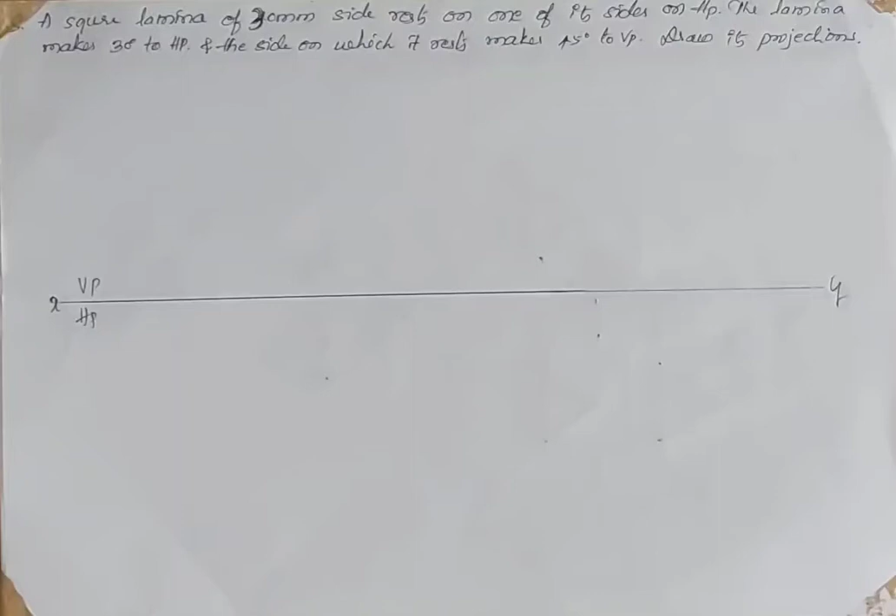A square lamina of 30 mm side resting on one of its sides on HP. Resting on one of its sides on HP is important. This is on HP on one of its sides or edges, meaning this side edge should come, and then which makes 30 degrees to HP.

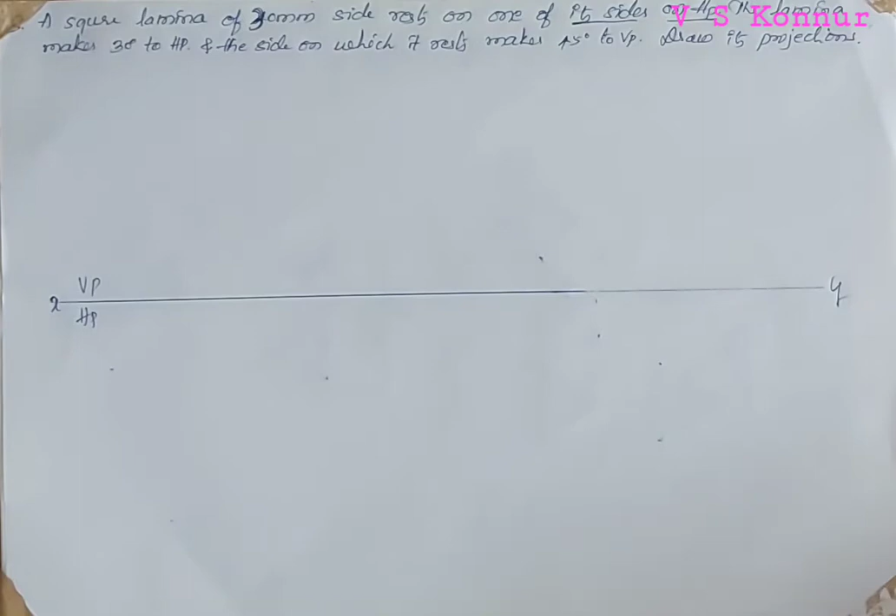The lamina makes 30 degrees with the horizontal plane. The lamina makes 30 degrees with HP, and the side on which it rests makes 45 degrees to VP, is the problem. Now we'll construct a square lamina resting on the horizontal plane.

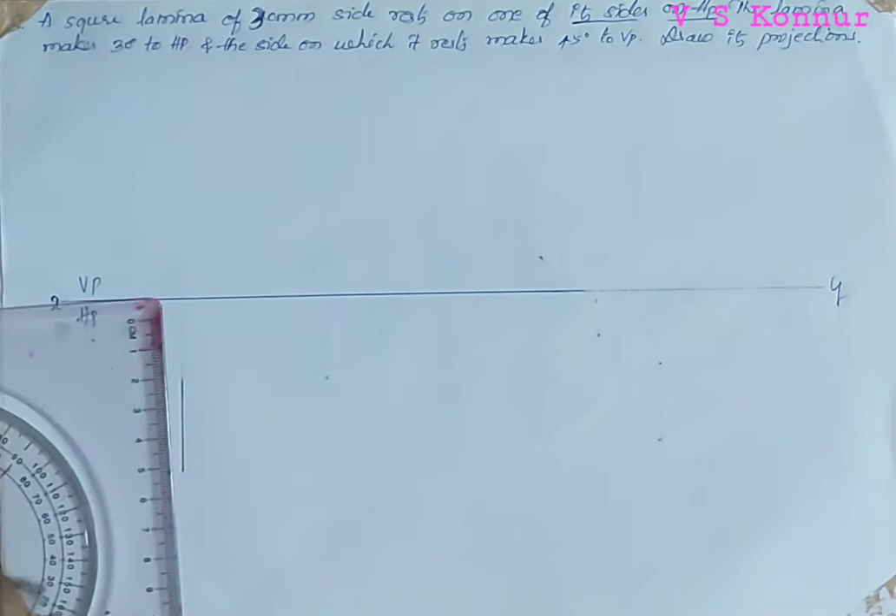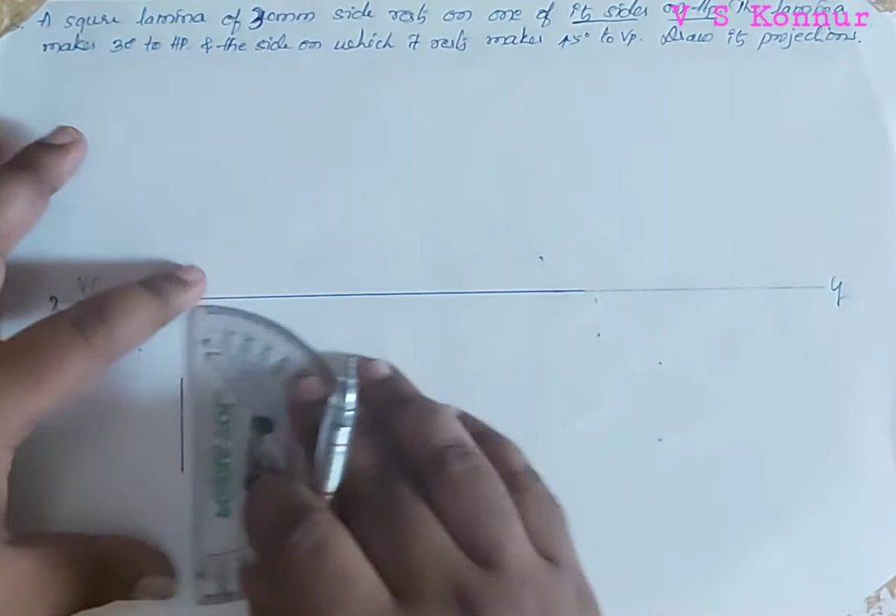So we'll draw. It is having 30 mm side, so we'll take 30 millimeter side. So 30 millimeter side I have taken, and then from this point you should take, from the end of 30 mm you should take 90 degrees, and then from this point you should take 90 degrees to construct resting on HP.

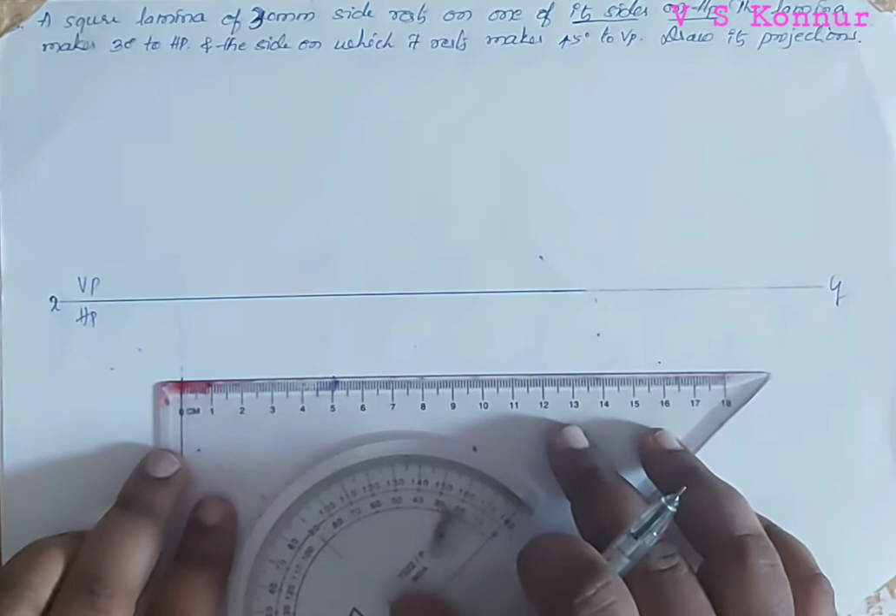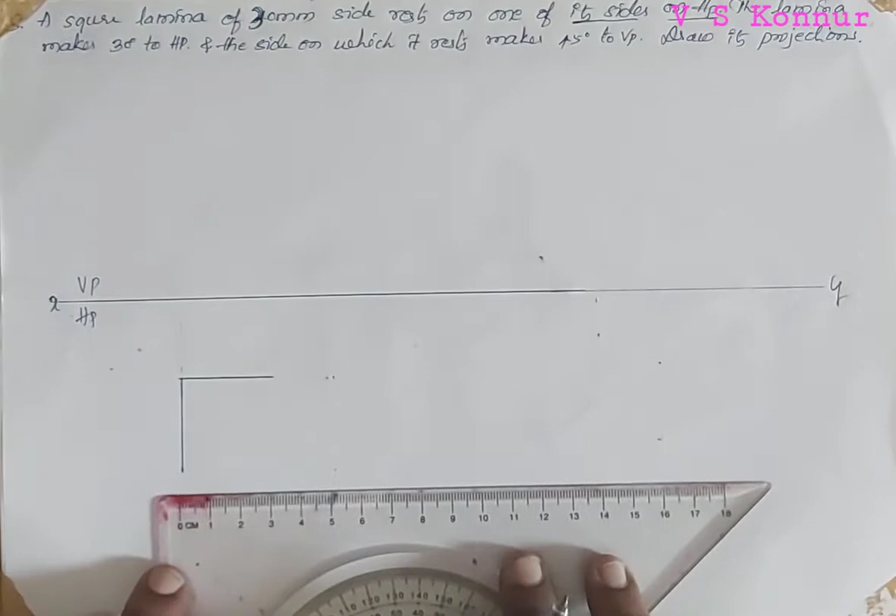On either side you should take 90 degrees, and then join with the help of only 30 millimeters. So this you have taken 90 degrees, so we will take 30 mm square, and then this is the 90 degree point. For that only take 90 degrees, only take 30 mm because the square is having 30 millimeter side, or you can draw the line and you can cut. So this is how you have to construct

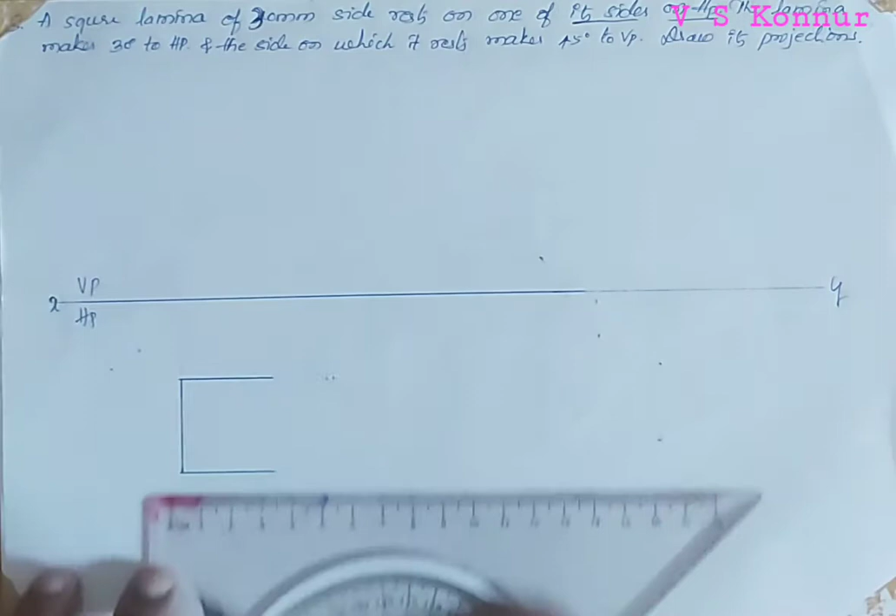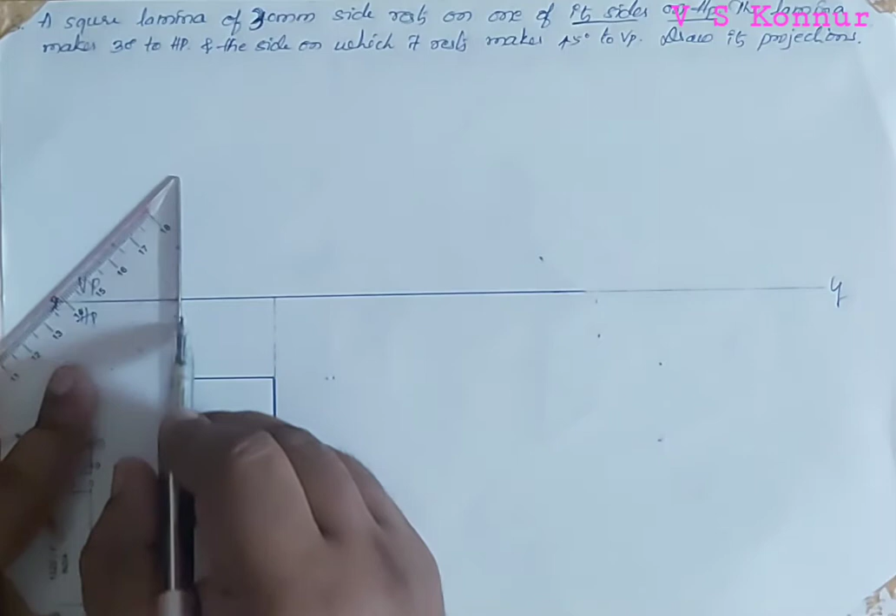a square lamina of 30 mm side resting on one of its sides. And I have drawn the projectors. These are the projectors, and it is having 30 mm side, 30 mm side which is resting on one of its sides.

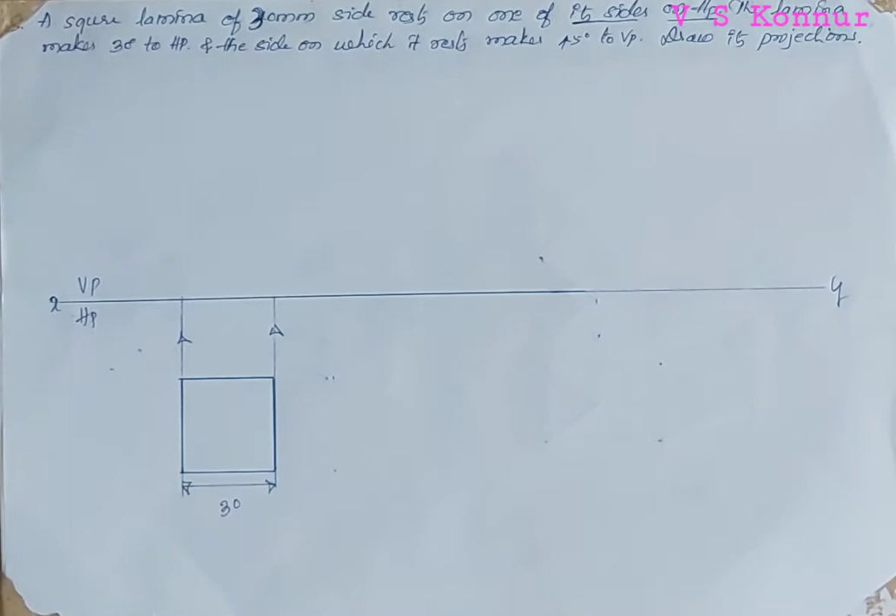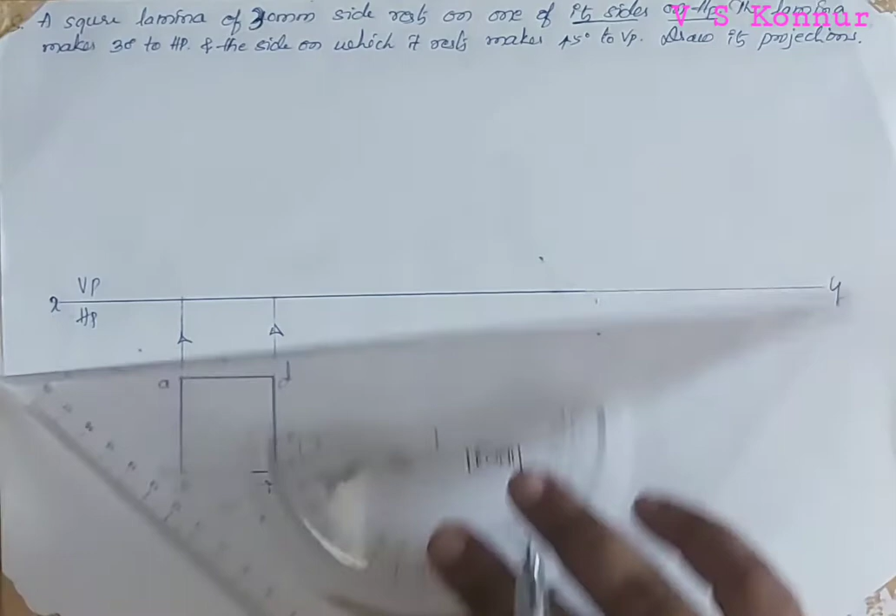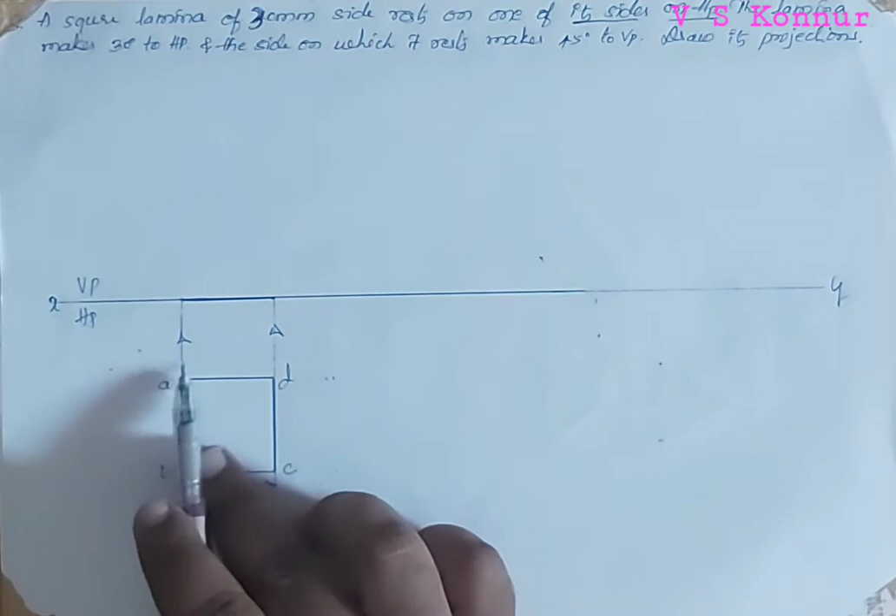A square lamina 30 mm side resting on one of its sides on HP. This is the first position. Then A, B, C, D. Then you should draw a lamina with a dark line by intersecting the projectors on XY line. So where these projectors intersect on XY line, that is called the lamina.

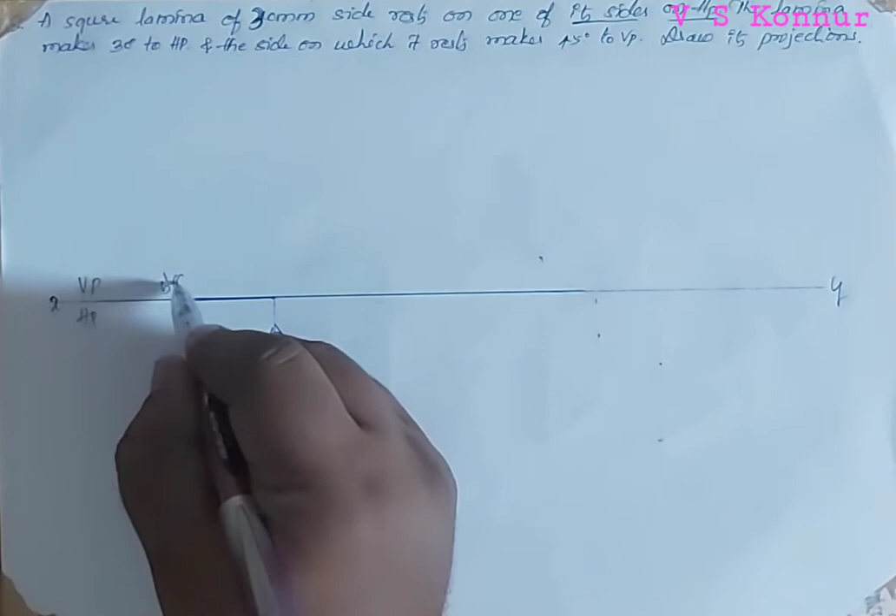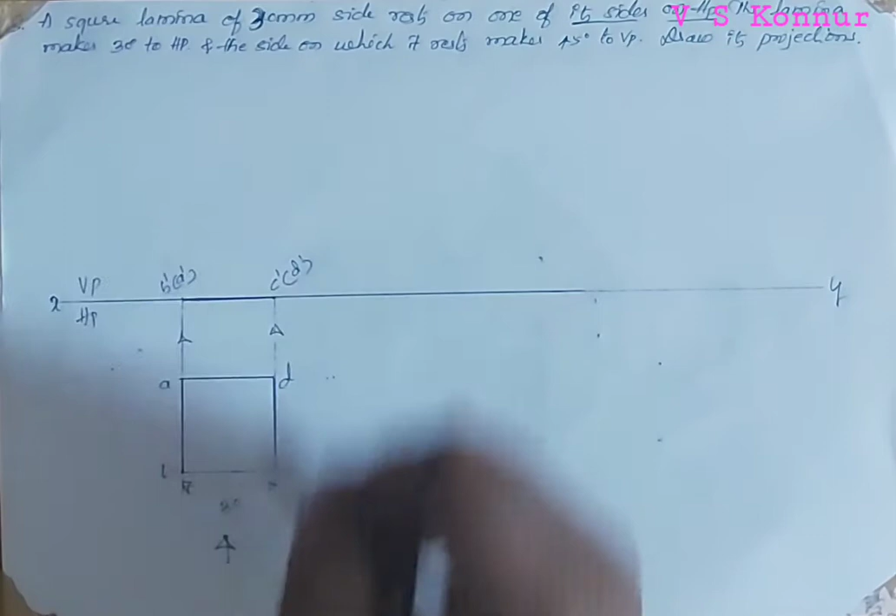So when you are viewing from this side, B is visible, it is outside of the bracket. A is not visible, inside the bracket. Dashed are always above XY line. Now C is visible, D is not visible, inside the bracket. So front view is always indicated with dash. So this is the first position.

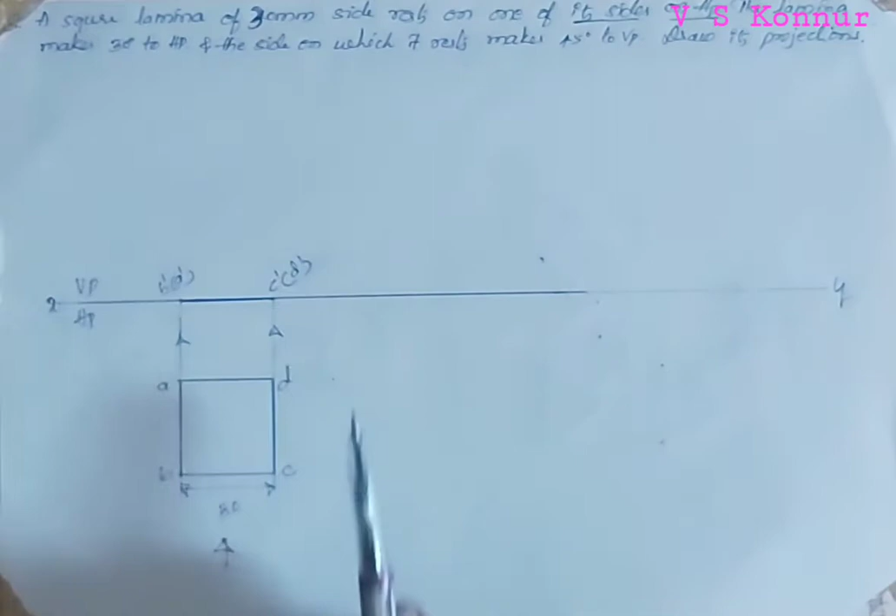Now second position, it is resting on HP. Because of that, HP angle you have to consider at the beginning. Now it is 30 degrees with HP. It is inclined 30 degrees with HP, and it should be drawn in VP. When it is resting on HP, you should select the HP angle first, and that should be drawn in VP or above XY line.

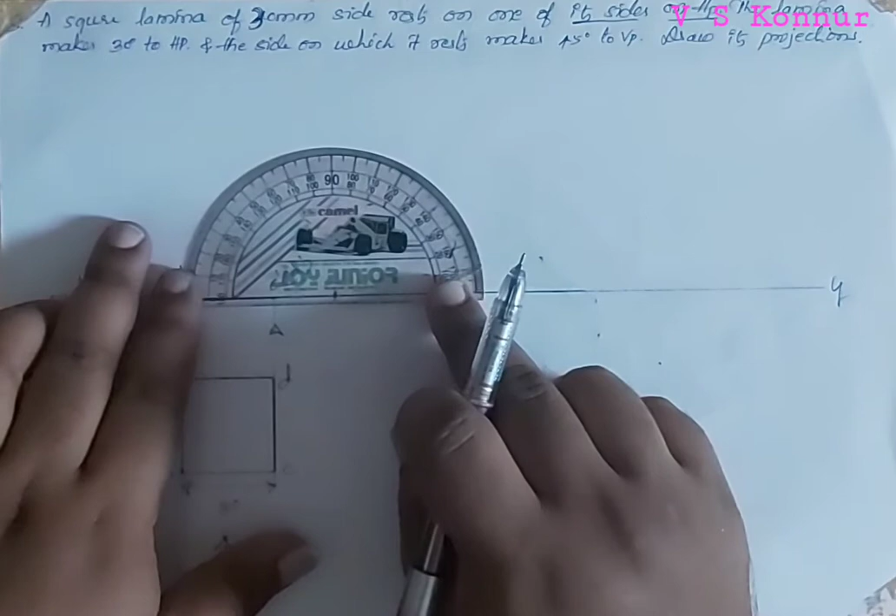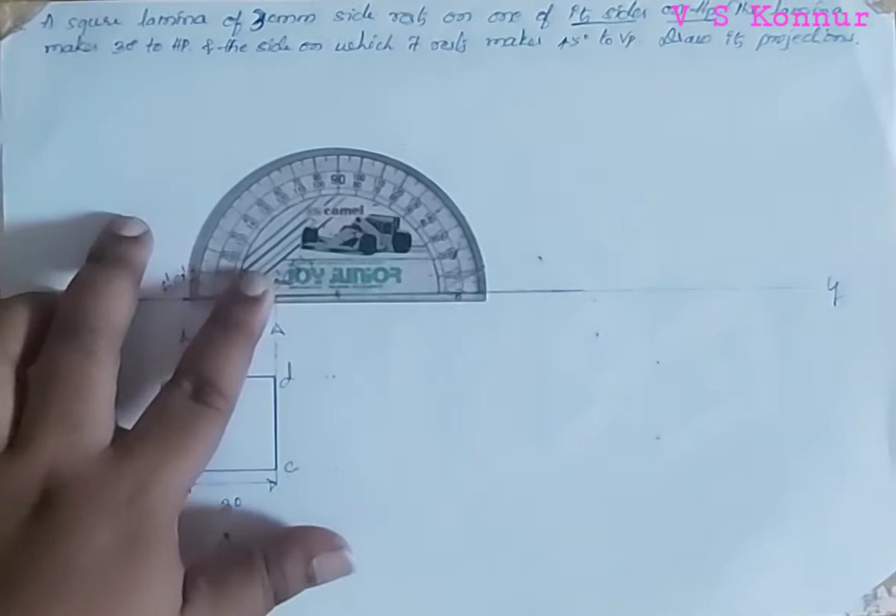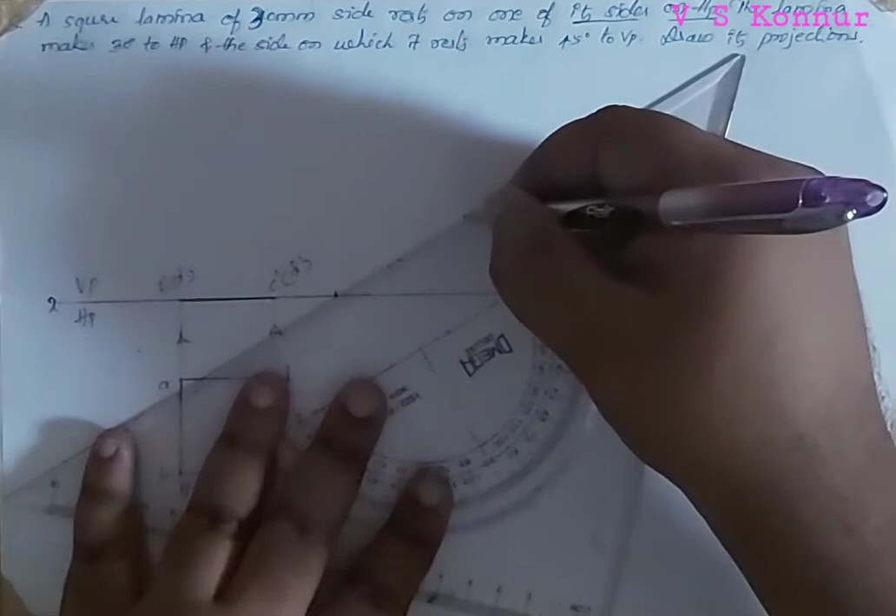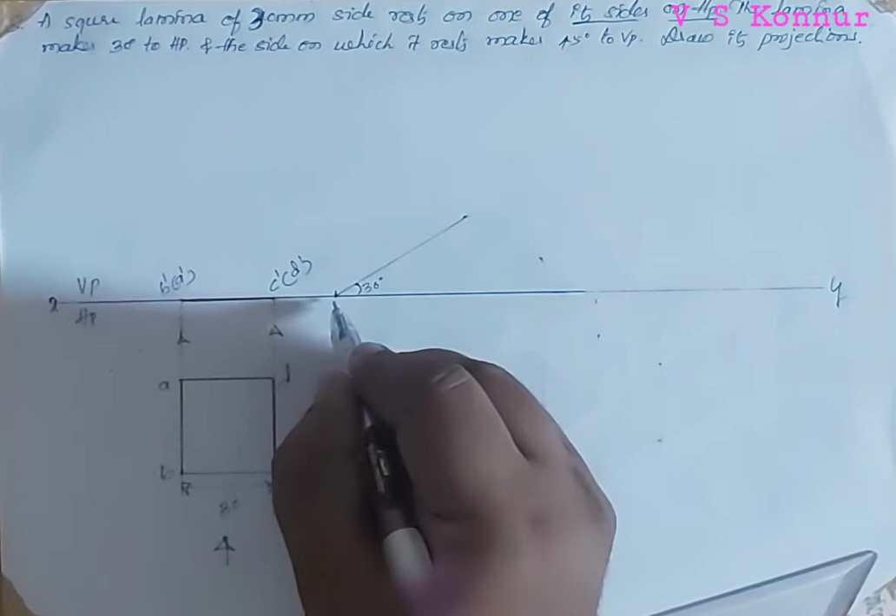From this point I will take 30 degrees. So from this point I will take 30 degrees. So I marked a 30 degree point there, and then we'll join these two points with thin lines. With thin line you have to draw the 30 degree line, and this point is nothing but B dash A dash.

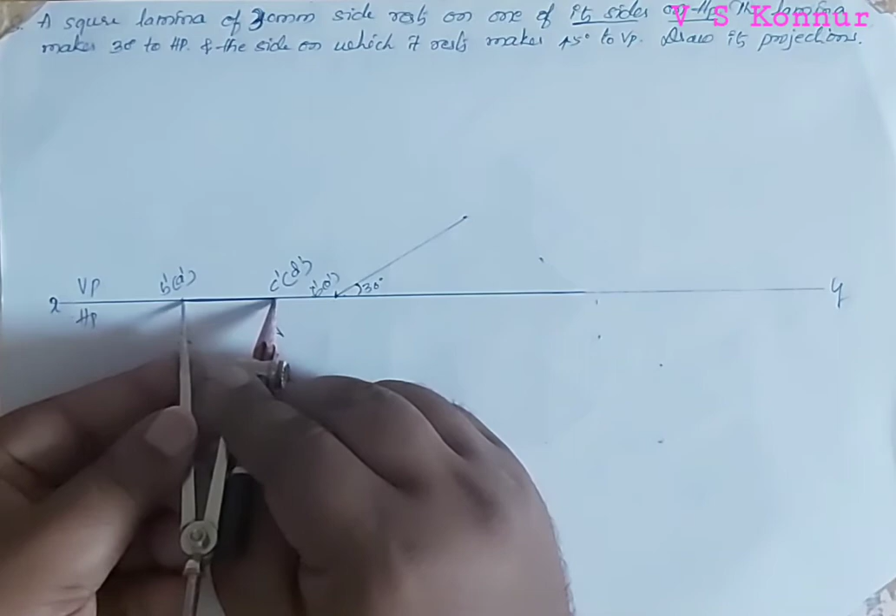Whatever the point I have marked here on the 30 degree line, that first point is called B dash A dash point, and then you should take the distance from B dash A dash to C dash D dash. So this distance you have to take, B dash A dash to C dash D dash. Then keep at B dash A dash point where you have drawn the 30 degree line, and cut that 30-degree line by B dash C dash distance.

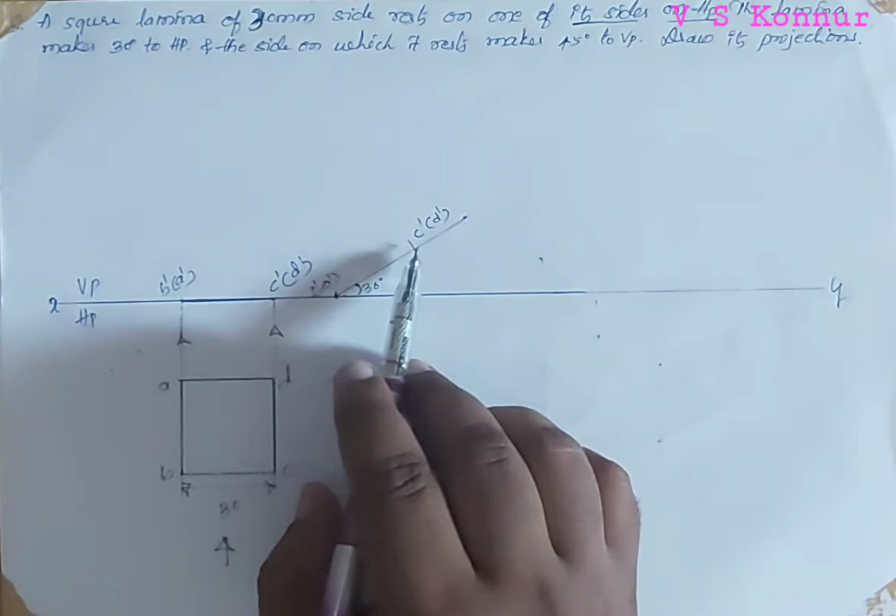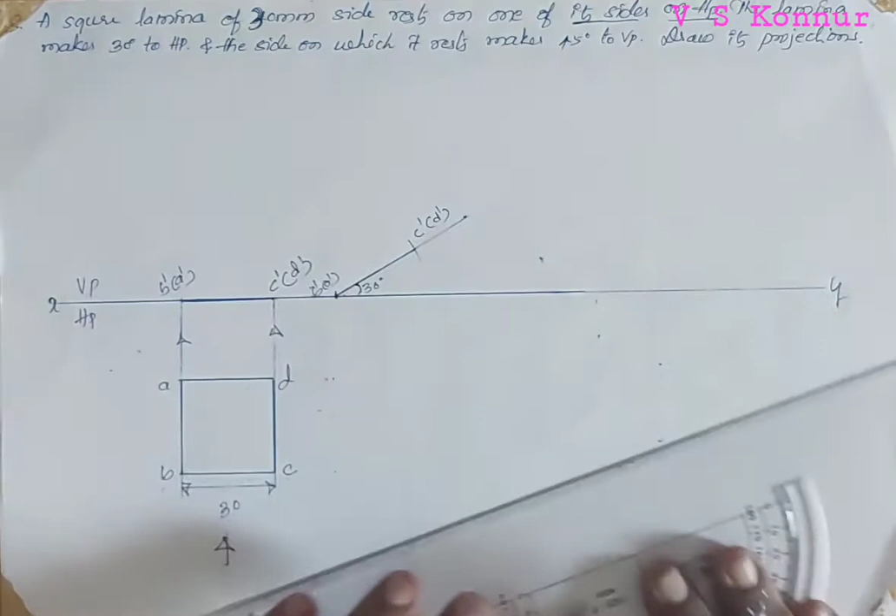Now we got here C dash D dash. The B dash A dash to C dash D dash distance we have taken from this lamina, and by keeping at B dash A dash point, cut this distance C dash D dash on the 30-degree line. Now make that point dark. Only this lamina you have to make dark. That is the construction line, the 30-degree line, it should not be dark.

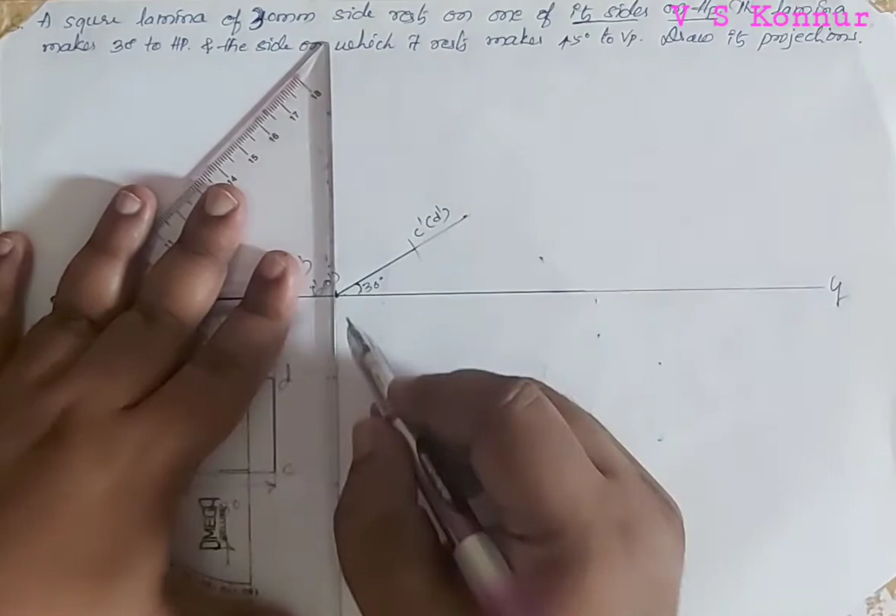And then draw the projectors, taking into consideration these projectors should be, so I'm just taking the parallel lines. So draw the projectors from both the points. With thin line you have to draw.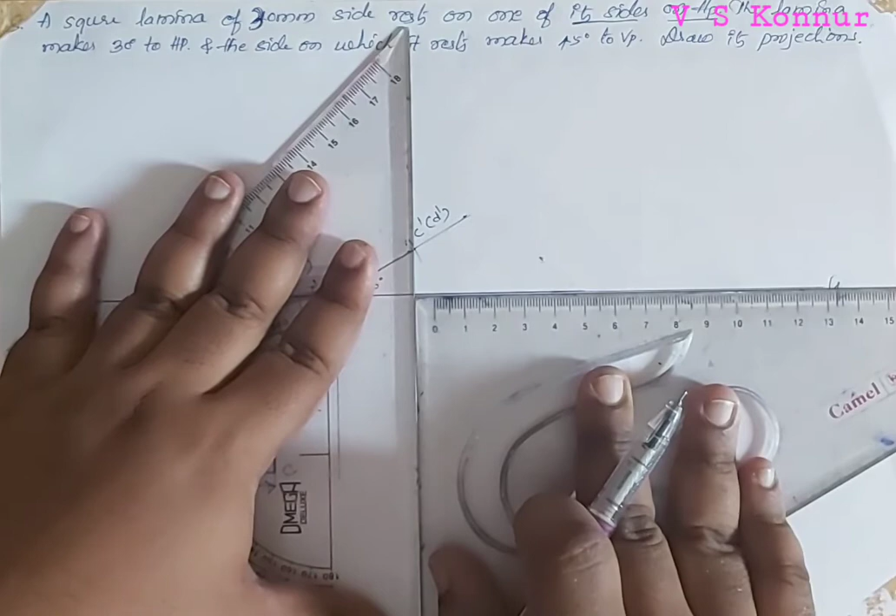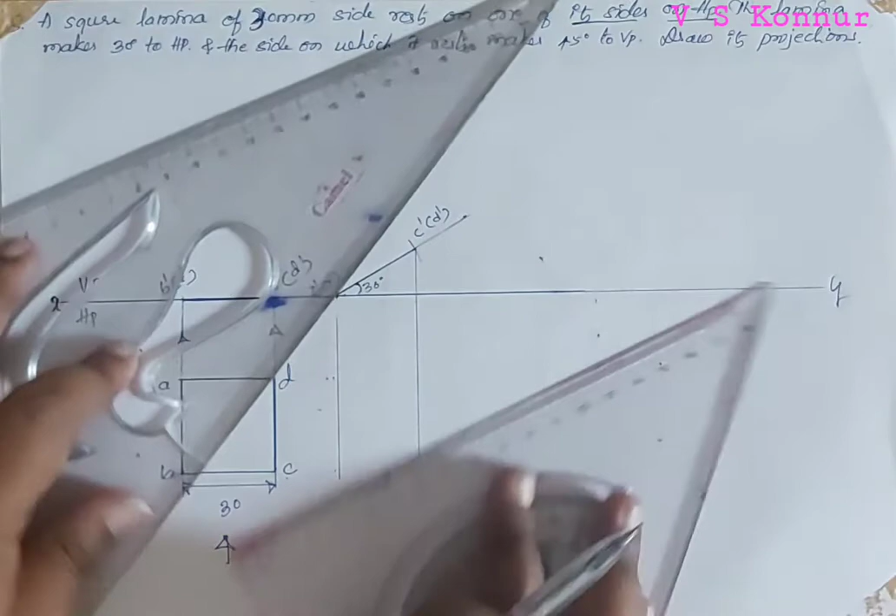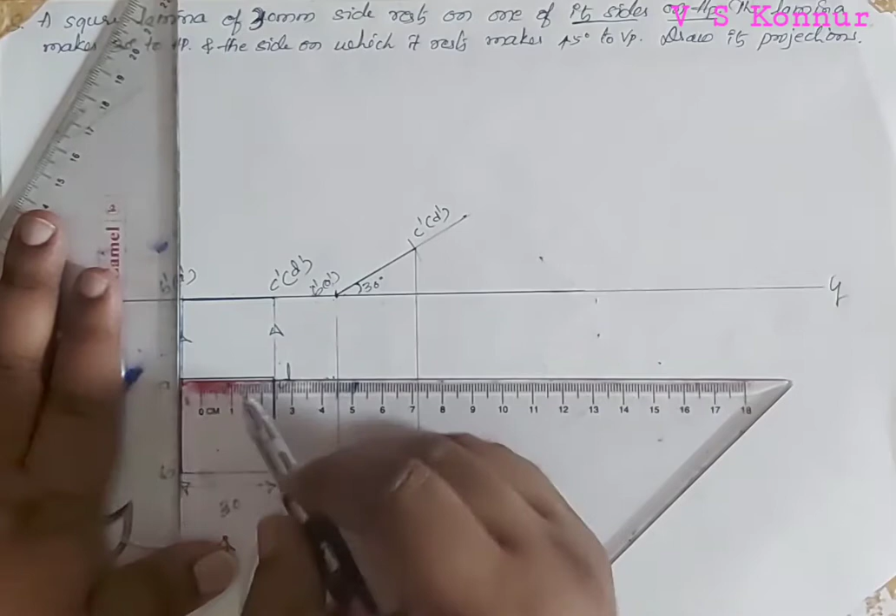And then draw the projector. Parallel to this you have to draw the projector. Or you can take this as reference and draw the projector lines. And we got all the projector lines. So just give the arrow mark for that, how these lines have been drawn.

So A is here, both are intersecting. This is A point. D is here, so this point is called as D. Both are intersecting at this point. B will come from top, so both are intersecting here. So A, B, C, D. Now make only that part dark, A, B, C, D.

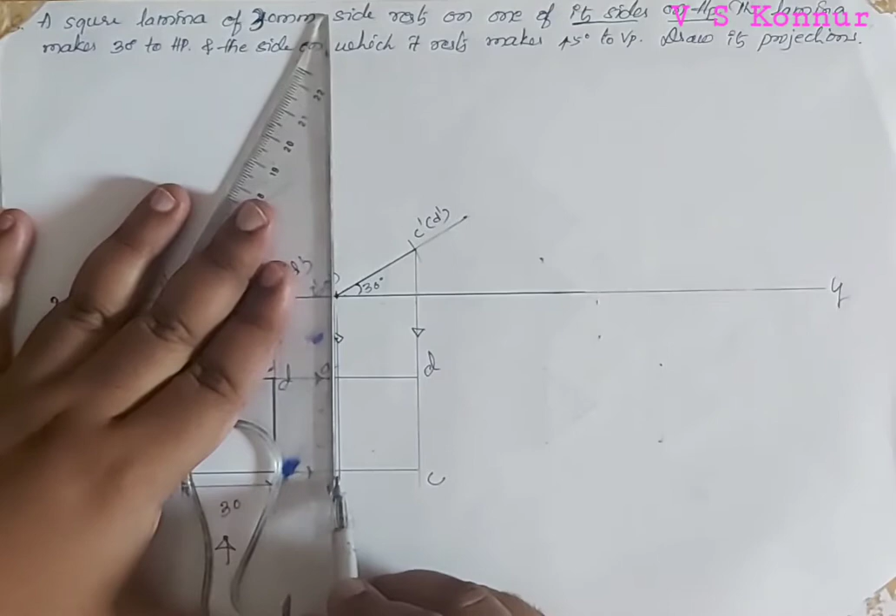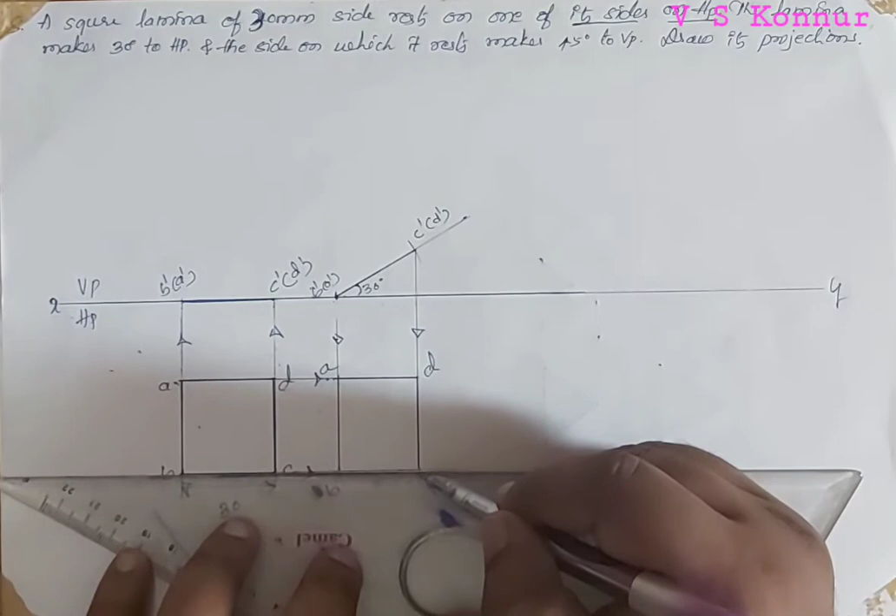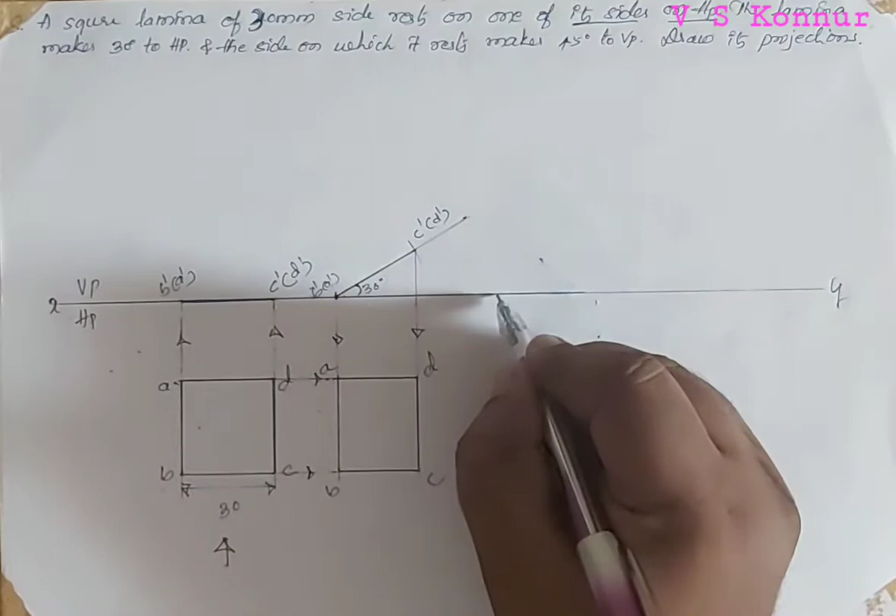Now, next question: 30 degree to HP is over. The side on which it rests is this. This side makes 45 degree with VP. So 45 degree line will be drawn here. From that point we'll draw the 45 degree line.

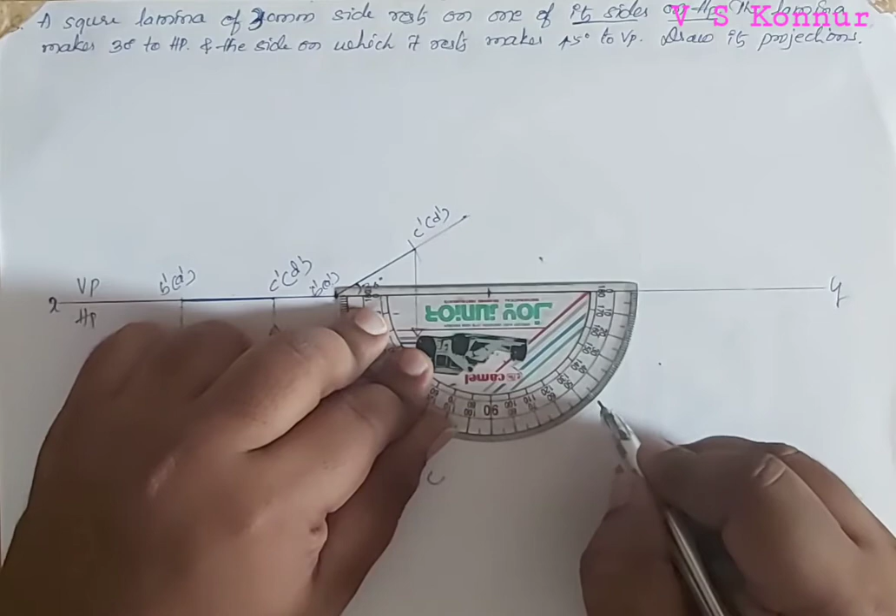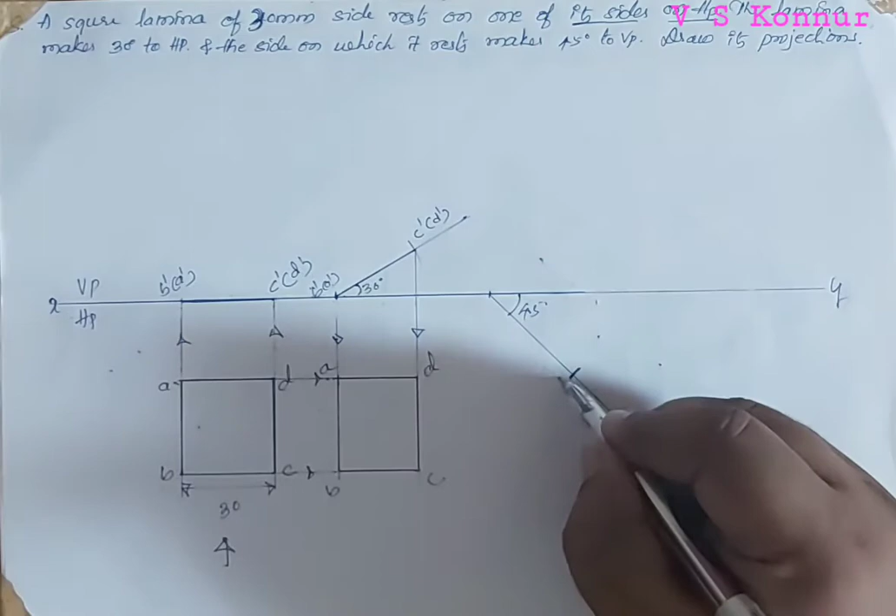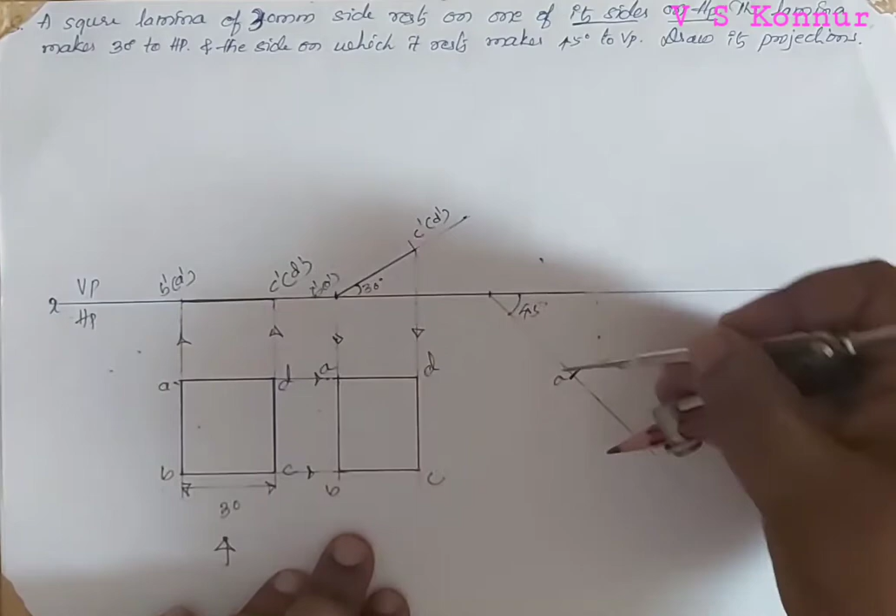Now join these 2 points with thin lines. Thin line. Now we'll mark A point. This is the 45 degree line I have drawn. I have marked the A point and I will take the distance AB, that is 30 millimeter. Keeping at A point we will draw an arc on the 45 degree line and we will get B point.

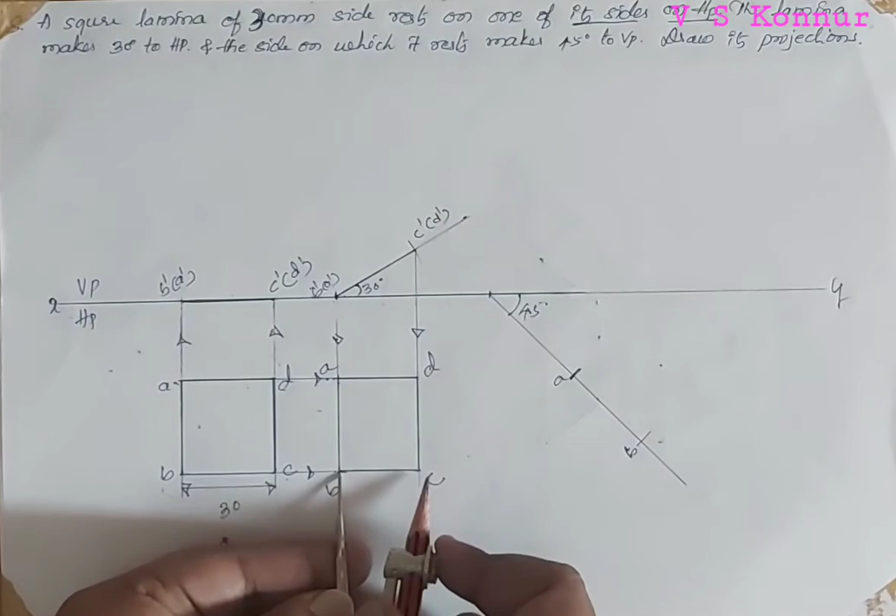From both the points you should take the distances by taking 90 degree or with the help of divider. Now we will take this BC distance or AD distance, both are same. So AB, BC or AD you can take, both should be same. So I will draw arc on either side. We will draw arc here.

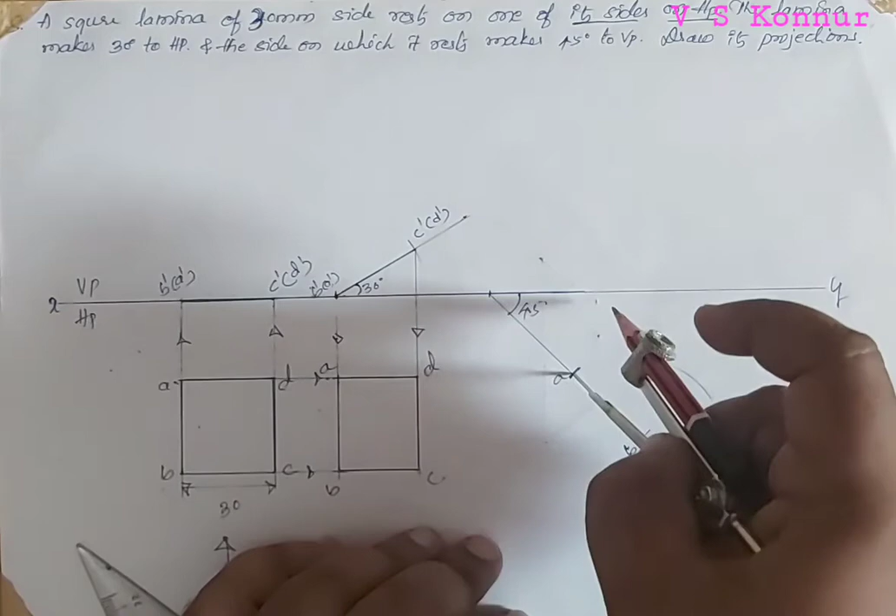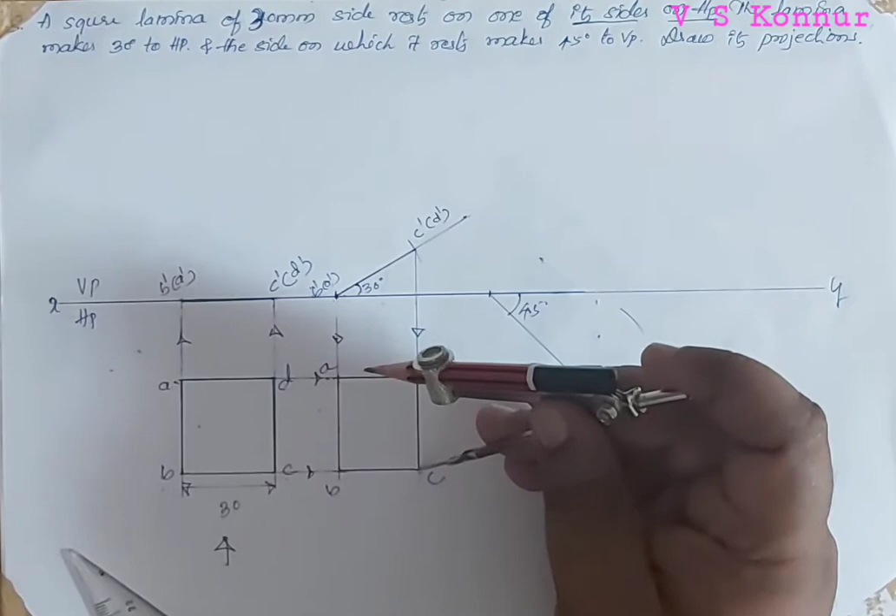Now after drawing the arc, you can take 90 degree from this point, or one more, I will explain here, the opposite corners. B to D is the opposite corner and C to A is the opposite corner. So both should have same distances. So by keeping at B point, cut that arc, and by keeping at A point, cut this arc.

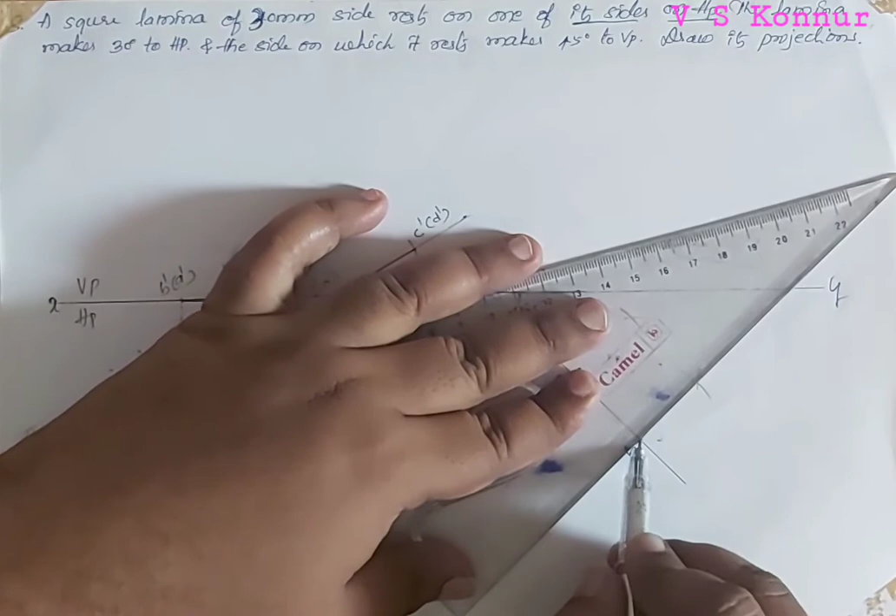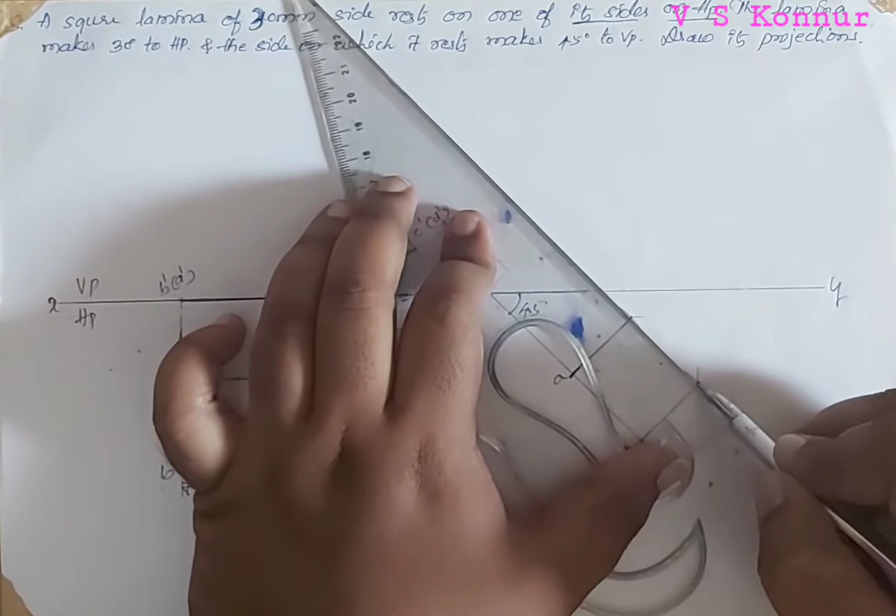So you will get 2 points. So just join by using scale. On either side you have to join. Then join these 2 points. And make this AB also dark. Now the same has been transferred here by using divider. There is no protractor. By using divider we have constructed ABCD at 45 degree line.

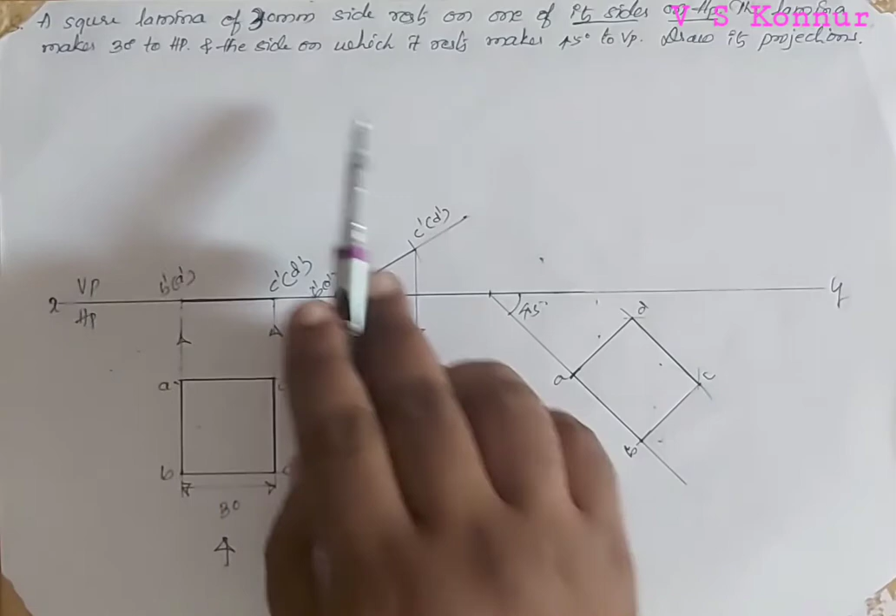Now we got ABCD here because the resting edge is inclined. Very important, the side on which it rests makes 45 degree with VP.

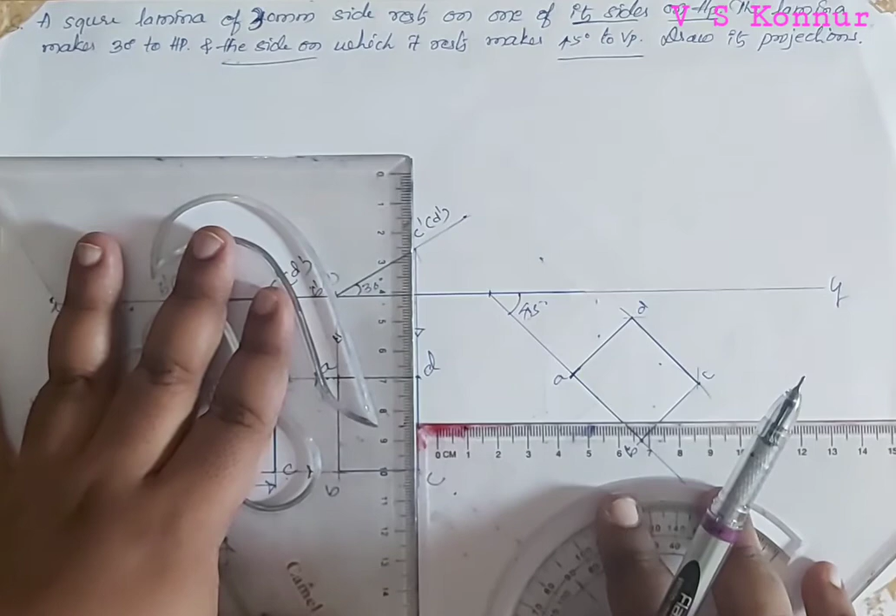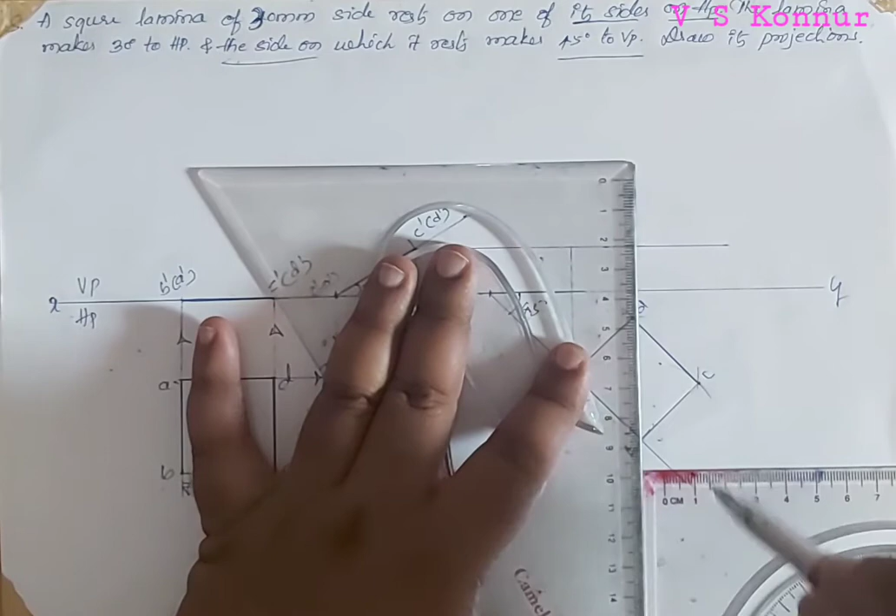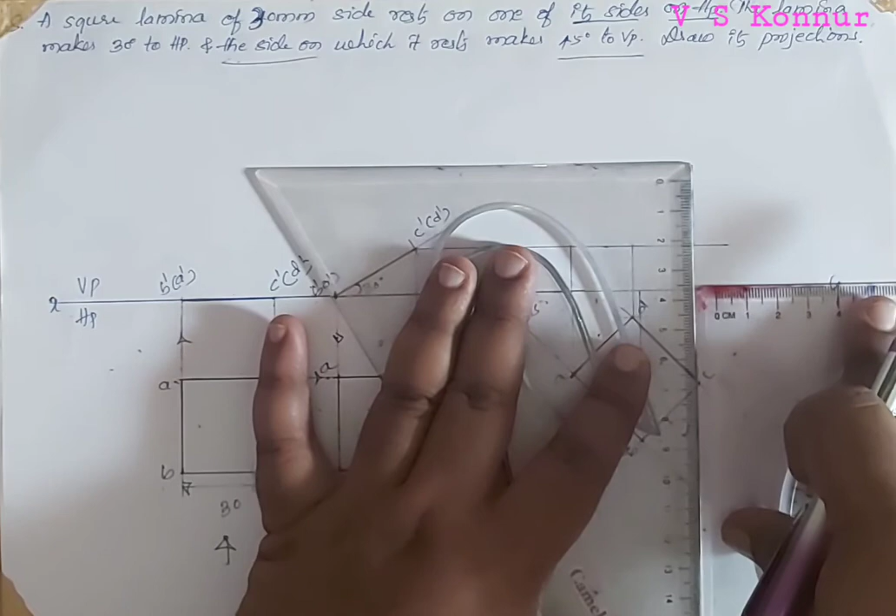Now from A point I'll draw the projector, and then from D point, then from B point, then from C point. I got all the points.

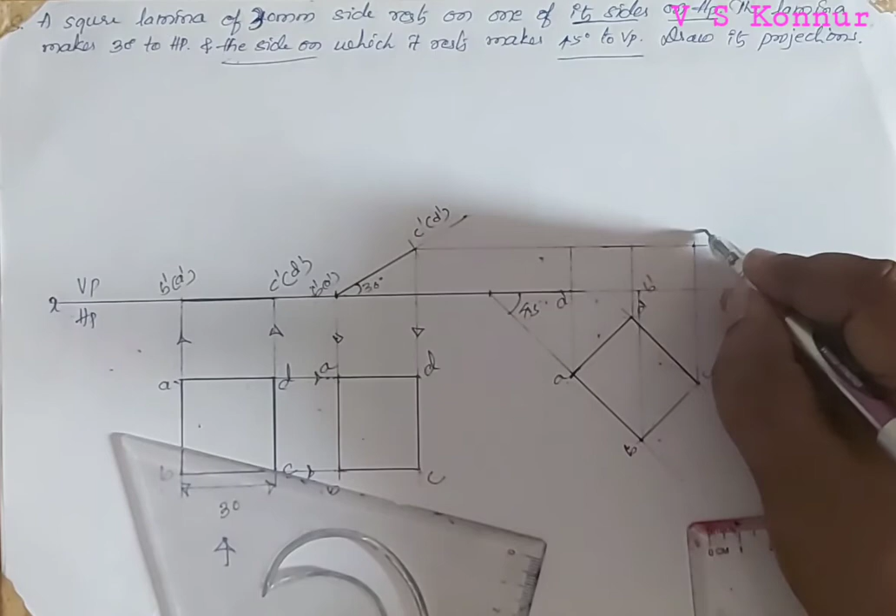Just mark here this A point and A point from here. It will be intersecting here. That is A dash. B dash point is here. Then we'll get C dash. Here we'll get D dash point. So we'll give the arrow marks for all those projectors.

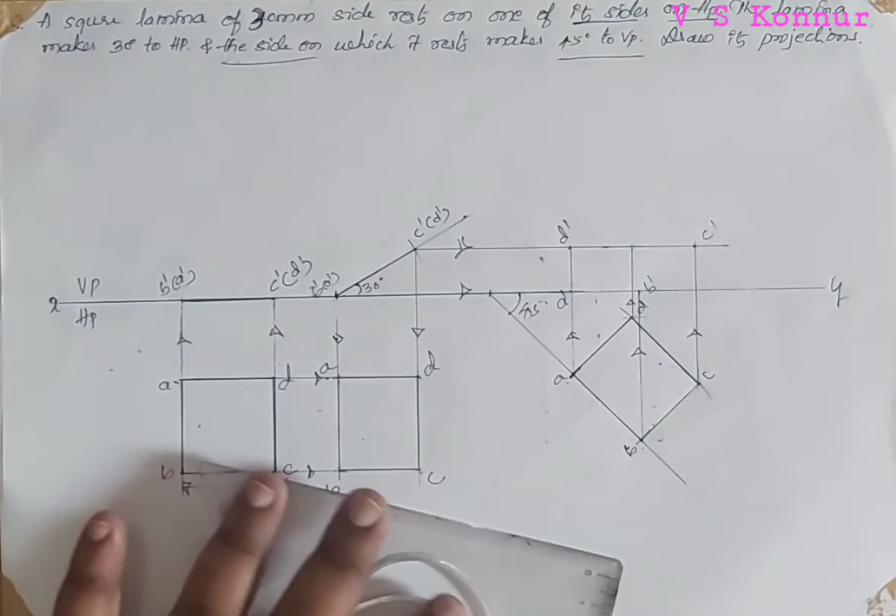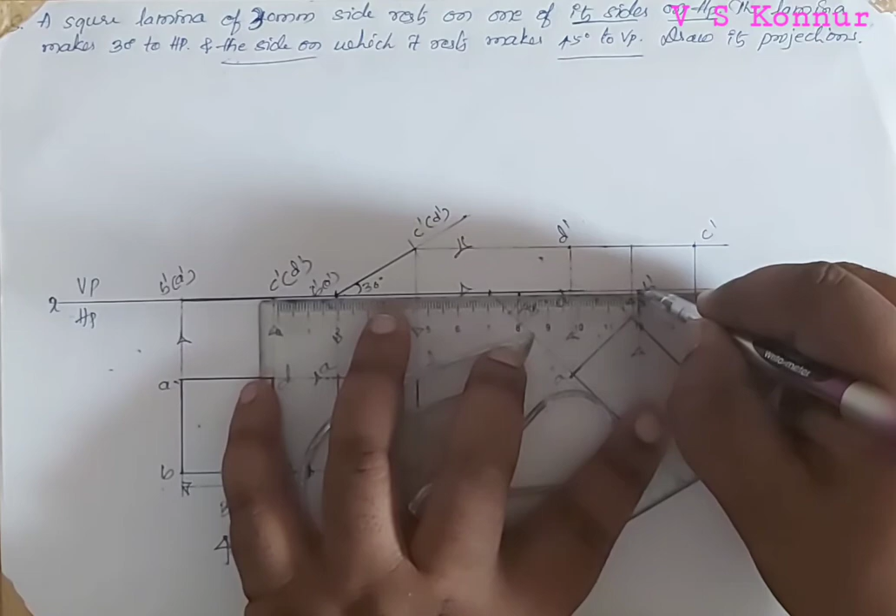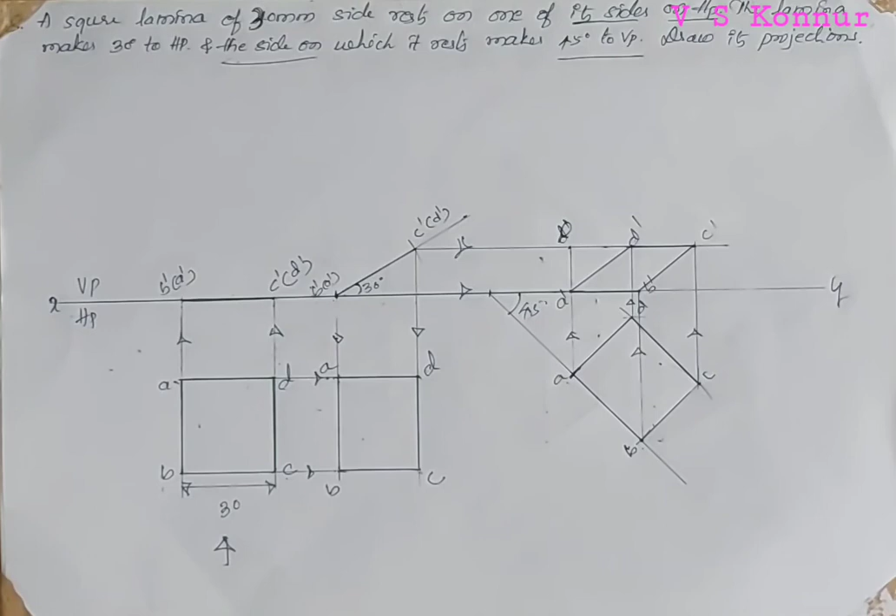Now we'll join all the points here, A to B, B to C. So first join these 2 points. D dash is here, A to D, then B to C, then C to D. So this is how to construct a square lamina resting on one of its edges, with the edge inclined in the third position at 45 degree.